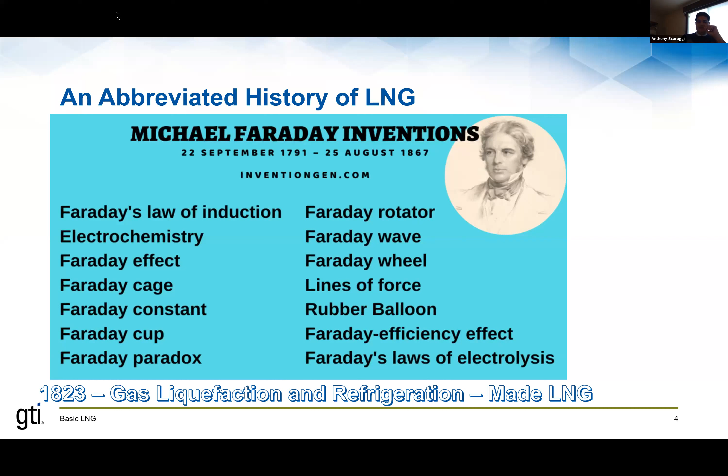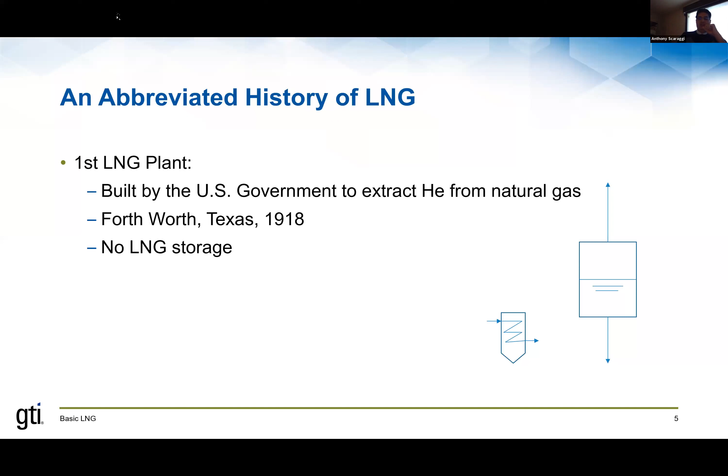The first LNG plant was actually built in the United States for the United States government, in Fort Worth, Texas. It had no storage. It was built to extract helium from natural gas to aid the World War I war effort. So LNG was, I guess you can say, a byproduct of helium production. That's another interesting tidbit.

The first LNG ship was developed by a company called Constock, ConocoPhillips, and Union Stockyard. Later Shell joined the mix. They converted a regular cargo ship to transport LNG. It was called the Methane Pioneer, a 5,000 cubic meter ship.

Its first LNG was produced in Louisiana in the United States and shipped to the United Kingdom. So the very first cargoes - people did not think in the old days of the United States as an LNG exporter. These days it's very different. But the initial shipment of LNG by ship was actually from the United States, which is pretty interesting from a historical perspective.

The first commercial LNG facility was built in the United States in East Ohio, at the East Ohio Gas Company, built in Cleveland in 1941. We learned a lot of lessons from that facility because one of the largest disasters occurred there at that LNG plant, which really taught the industry lots of lessons. We have a very, very safe industry now.

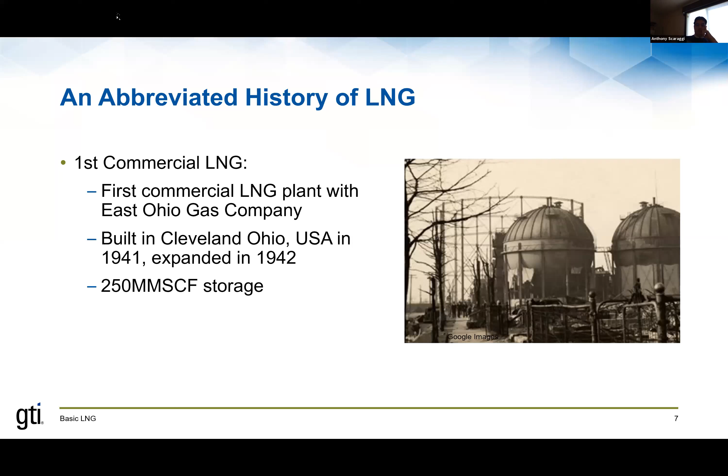The first baseload LNG export facility was in Algeria, commissioned in 1964-65, and it was in service up until around 2003. So it was a very productive plant. The original facility used a unique design where it actually stuck LNG into the ground and froze the ground - that was the tanking system used to store the LNG. That's not done these days because it's not very efficient, but it was a unique application back then. So that's the real basics of LNG history.

So what is LNG really? LNG is nothing more than natural gas that's been cooled down and turned into a liquid. Natural gas has many components. It has methane - the simplest hydrocarbon, with one carbon atom and 4 hydrogen atoms. Natural gas is made up predominantly of methane, but it also contains ethane, propane, butane, pentane, hexane, and many other things.

When you discuss lighter end components and heavier end components in natural gas, you're generally talking about molecule size. CH4 would be the lightest component, and hexane, C6H14, would be the largest component on this list. If you look at the right column, you see C6 plus. In the natural gas industry, components over C6 generally make up a very small part of the whole natural gas stream, so they tend to lump them together - C6 plus means any molecule of C6 and higher.

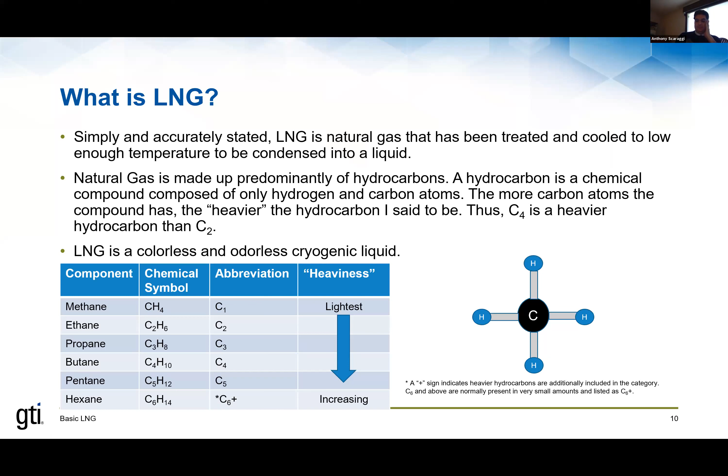What is LNG, and what are its properties? When you talk about LNG, and even natural gas, one tripping point is that all natural gas is not the same, and therefore all LNG is not the same, because LNG is derived from natural gas. So when you talk about the properties of LNG, somebody might say the temperature of liquefied natural gas at about 1 or 2 psi as a liquid is minus 260 degrees Fahrenheit, while somebody else might say minus 258, or even lower or higher numbers. It's not because one person is more correct - it really depends on the composition of that natural gas, from which you derive the specific properties.

So anytime you hear about a property in natural gas or LNG, and someone mentions minus 260 or minus 160 as to when vapors are lighter than air, just remember that. Just because someone else uses a slightly different number doesn't mean one person is right and one is wrong.

An important point here is that LNG, as it sits in storage, its composition will actually change over time. That's because it's slowly boiling away, and as it boils, the lighter end components predominantly turn to vapor, which means you're concentrating the LNG in that tank to the heavier hydrocarbons. So over time, the composition and all the properties of the LNG will change within a tank. The longer it's maintained in storage, the higher the heating value rises to, and it'll actually warm up in temperature.

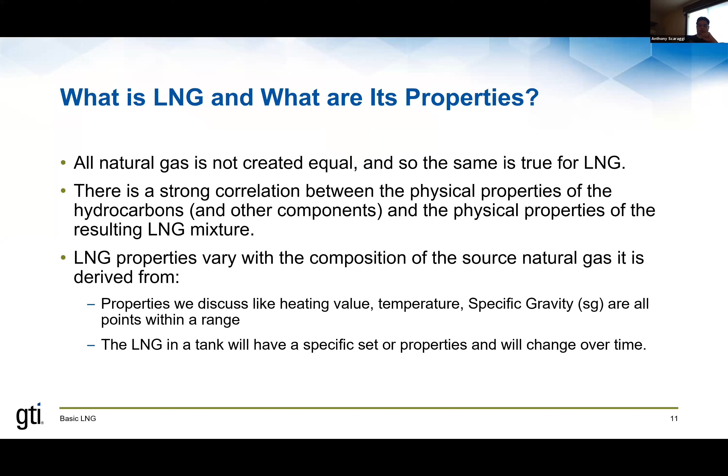But just something to keep in mind. So, properties of LNG: really what LNG is, is natural gas in its liquid state, mostly methane. It does contain ethane, propane, and sometimes traces of other components like butane.

When I showed you the previous slide, I showed you that you had methane, ethane, propane, butane, all the way up to hexane 6+, but you don't have all those components in liquefied natural gas. As you make LNG, those heavier components will actually turn to liquid sooner and be extracted from the process, because if they're not, they will freeze up in the equipment before you turn the methane into LNG. So even though natural gas has products up to C6 in it, you won't get that in your LNG. LNG is not stored at pressure, it's stored just above atmospheric pressure, and at that pressure LNG will remain at about minus 260 degrees.

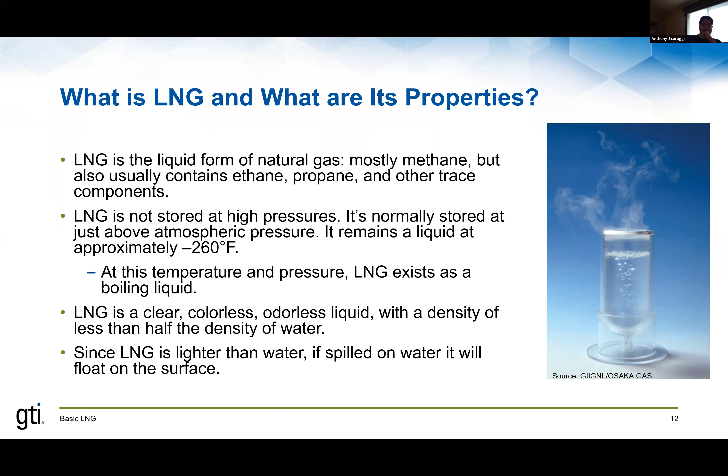So what are the properties of LNG? It's a cryogenic liquid, minus 260 degrees Fahrenheit, and as such it requires special handling. Those are cryogenic temperatures, very, very cold temperatures. When you liquefy natural gas, the reason you do that is because you gain a benefit, and that benefit is that you reduce the volume of that natural gas by about 600 to 1.

So you can think about a glass of water. You can have one glass of water or 600 glasses of water, and 600 glasses of water take up a lot more space. So when you're trying to store natural gas, if you store it as LNG, you can take up a lot less space. It's very, very economic that way, and it also lends itself much easier to transportation across great distances.

LNG is not flammable and not explosive. That's important, not everybody understands that LNG itself is not flammable. The vapors that are liberated from the LNG are flammable, and those vapors are just like natural gas vapors. Natural gas vapors are only flammable in the range of 5 to 15%, and in unconfined areas natural gas will not cause an explosion. So you have the same exact properties with LNG once it turns back into a gas as you do with natural gas.

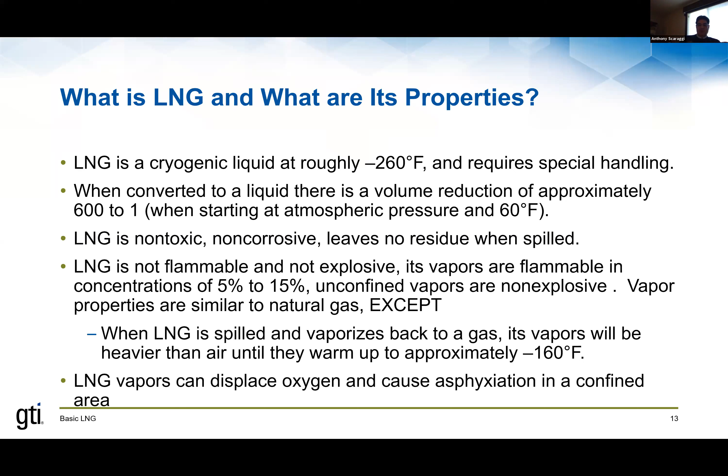So at minus 160 degrees Fahrenheit is about when the vapors of LNG become neutrally buoyant. So if you did have a spill of LNG, that LNG vapor would remain close to the ground until it warms up to minus 160 degrees Fahrenheit. At that point, it would then dissipate and act just like natural gas. And keep in mind, if you have heavy vapors and you're in a confined area, those vapors can actually displace oxygen, so it can cause asphyxiation if you're in a confined area.

So why LNG? We talked about this a little bit before. Arguably, the best reason for converting natural gas to LNG is because of the huge volumetric efficiencies you get in storage.

And those volumetric efficiencies allow natural gas to be efficiently transported over long distances. The other major benefit to LNG is that because you can hold so much volume in such a small place, a facility like this that may not have access to large pipelines, or in some cases may not have access to any pipelines, can still support a local grid system on natural gas.

So it's an available energy source, bringing a reliable energy source to areas where pipelines might not exist now but may exist in the future. You can build the natural gas infrastructure in a region, service that with liquefied natural gas, and then over time build a pipeline system into that area.

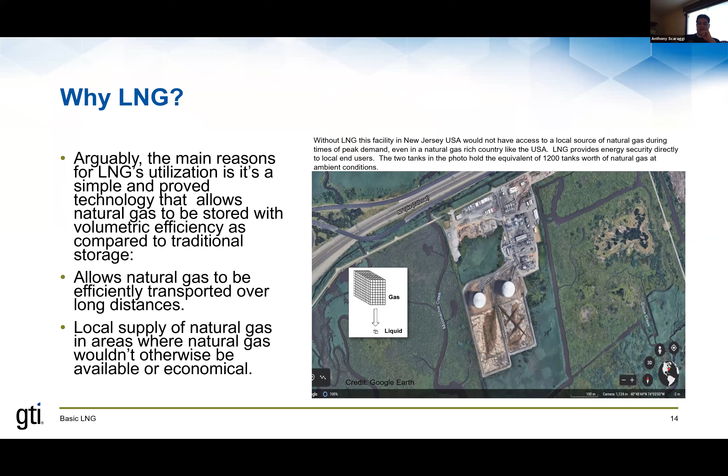So what makes LNG special? Well, one of the best parts, as a chemical engineer, I can tell you, is that it's easy - it's totally a thermodynamic process. There's no chemical process that takes place. If you have an air conditioner and understand how it works, it's basically the same idea for taking natural gas and cooling it down, except that you cool it down much colder than you do air in HVAC systems.

You cool it down enough so that you can turn the natural gas into a liquid, and that's at minus 260 degrees Fahrenheit.

As a liquid, being minus 260 degrees, the materials that you use that are required in an LNG facility or in LNG applications are very, very unique. As things get cold, they tend to get brittle. Brittle things tend to fracture, tend to be susceptible to shock and fracture as a result of that shock. So the materials used in LNG applications have to remain ductile at these very, very low temperatures.

The other special consideration is that the capabilities of materials at cryogenic applications have to actually be investigated in a laboratory and determined. You cannot extrapolate data to determine how a material will react at those cryogenic temperatures.

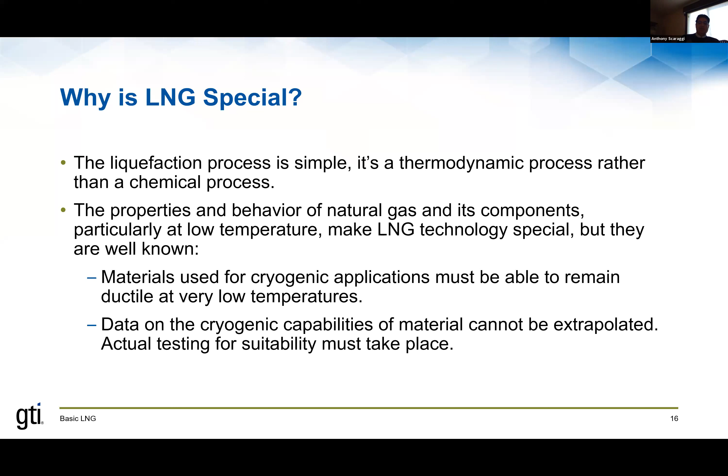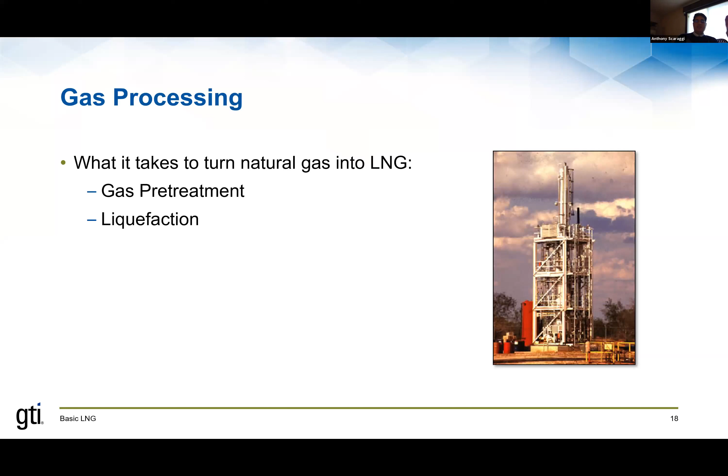Making liquid: what it takes to actually take natural gas and turn it into LNG involves two broad steps. One is gas pretreatment, and the second step is actual liquefaction. We talked about natural gas containing many, many components - when it's pulled out of the ground, natural gas contains methane, ethane, propane, butane, and heavier hydrocarbons. Well, that's actually after that natural gas gets processed somewhat to clean it up a bit.

So if you don't take all those items out before putting it in a pipeline and using that pipeline gas to become LNG, you have to take all that stuff out, plus more, before you can actually take that natural gas stream and turn it into a liquid.

In a natural gas field, you'll have nitrogen, ethane, butane, heavies. You'll have compressor oils, because in those wells, to extract the gas, you have compressors and equipment that you run. So there's compressor oil, there's hydrogen sulfide, which is a poisonous gas. There's water in that natural gas, as well as the other items we talked about. You have carbon dioxide, sometimes carbon monoxide. You've got all kinds of dust, all kinds of stuff that is naturally occurring in natural gas.

So in order to turn that into liquefied natural gas, you've got to get rid of all the stuff that's going to screw you up.

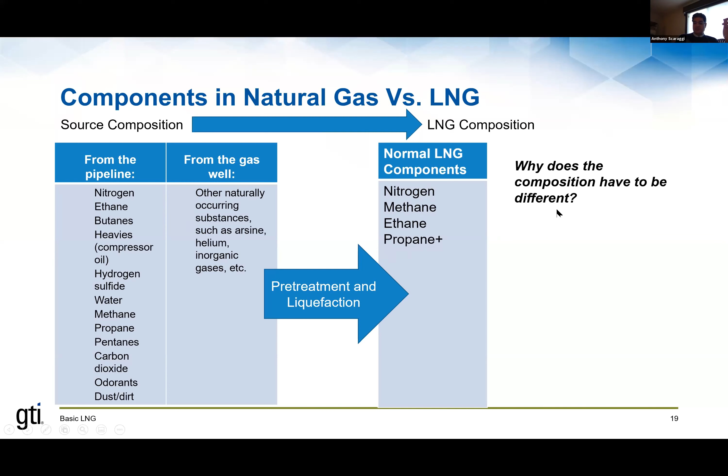So why does the composition have to be different? Well, I just gave you the preview on that. Components will freeze out, foul your equipment. You won't be able to make your LNG. You'll wind up having a lot of downtime in your plant. So these are the things that are typically removed from natural gas before you make LNG.

And mercury's kind of a critical one. There are trace amounts of mercury in some natural gases, and mercury will actually cause a specific type of corrosion in aluminum equipment. So if you have mercury in your gas, you have to have a special treatment system to remove that mercury. Otherwise, not only will you foul equipment, but you'll also have stress corrosion take place in that equipment.

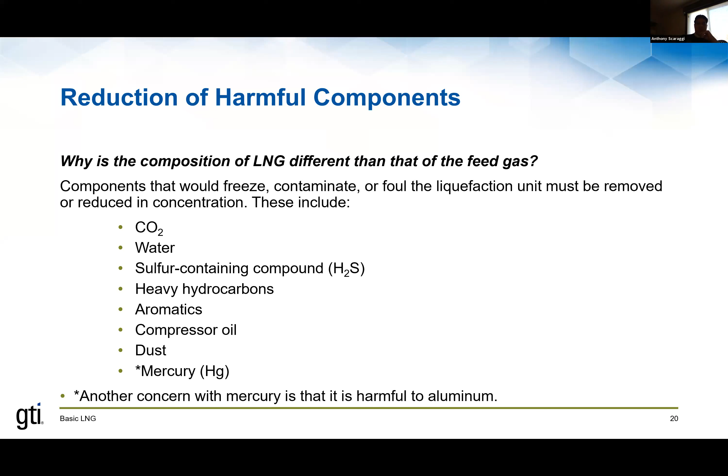So how is LNG made? There's really two steps to the second part of the process. There's the pre-treatment, then there's making LNG. It's a two-part process. You start cooling everything down, and you start removing the heavier liquids that will come out.

So if you have any pentanes, they will start to condense out as the temperatures get lower and lower. And so you remove those from your process as you go along. You don't carry them over into your process. Otherwise, once again, they would freeze out and plug up your equipment.

And then you have the final stage of liquefaction, something called a flash. This is also called a Joule-Thomson valve, or Joule-Thomson effect. There's also a flash valve in your normal air conditioning equipment at home, so it's no different than that. But this is the final step in making LNG.

It's a flash process where you take cold LNG that's at high pressure, coming out of this unit, and you let the pressure down very rapidly to a lower pressure, somewhere in the neighborhood of 30 or 35 psi, depending on the height of the liquid you're depositing into. That's an isenthalpic reaction, which simply means there's no change in enthalpy across that valve. And if you look at the enthalpy curves for any fluid, any gas, any liquid, you'll see that a rapid reduction in pressure gives you a very steep decrease in temperature.

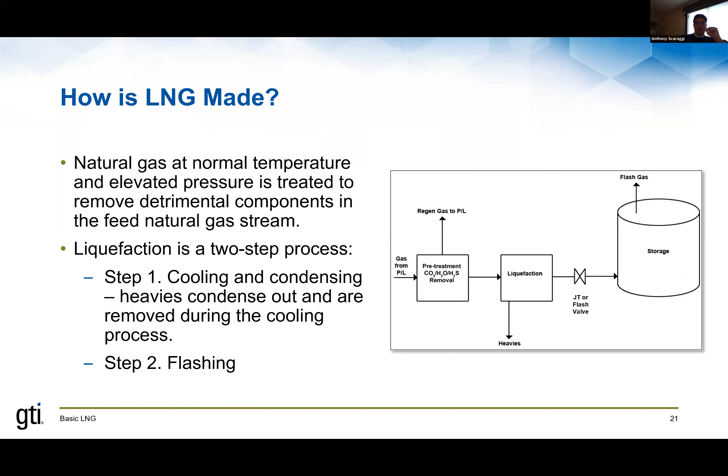So making gas, right? Now you've got this liquefied natural gas, and it's been stored or transported to an area and kept in storage where it can be used, or it's needed so it can be used. And now it's time to use it. So what do you have to do? You have to turn it back into natural gas, into gas.

So the easiest way to do it is just to heat it up. You take that minus 260 degree LNG, put some heat into it to the point where it all vaporizes, turns back into a gas, and then you heat that gas up to some usable ambient temperature. How that's done is with equipment called vaporizers. There are several styles of vaporizers, and I have a few listed here: an open rack vaporizer, submerged combustion vaporizer, shell and tube vaporizer, ambient vaporizer. Regardless of the equipment you use, the goal is just to drive heat into that cold liquid to turn it back into a vapor so it can be used, either put into a pipeline or used in some other chemical process, like making fertilizer or whatever. But you need it in its gaseous state to actually use it.

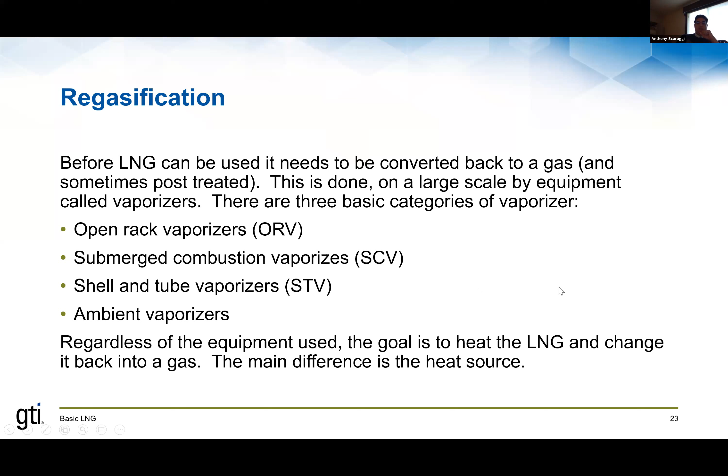One of the benefits of it is that you're not using any additional external source of energy to heat up the LNG. You're using the temperature of seawater. You don't have to burn natural gas and use the heat from that combustion to turn this LNG back into a gas. So seawater is one vaporization system that's used for that, and there's no additional heat source needed.

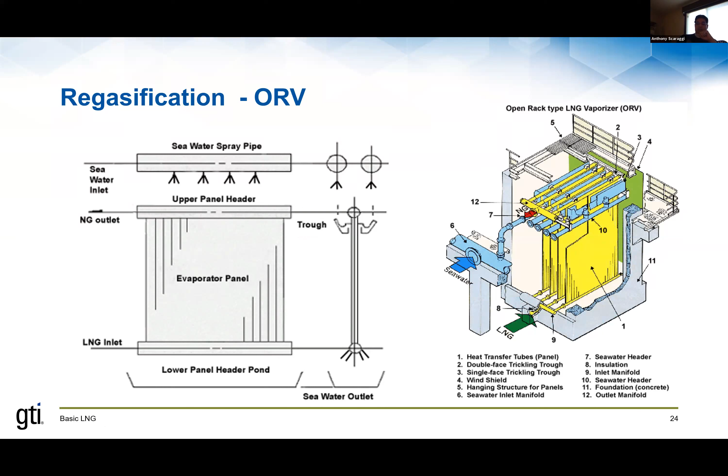You actually have the flame and its products of combustion impinging on the water. If you had one of these things operating and could look inside, which you can't since they're steel or concrete boxes, but if you could cut a window into it, what you would see is something that looks like a jacuzzi - water just bubbling away, lots and lots of turbulence, which makes these things very, very efficient. You've got this burner, using natural gas to fire these, and you send liquid LNG into a big tube bundle, a pipe that's usually coiled up inside this water bath, and around the water bath are the products of combustion being pushed up through the water over this water bath.

That intimate scrubbing effect you get from those bubbles transfers a huge amount of heat from the combustion process into the LNG in the tube coil, turning it back into natural gas, or turning it into its gaseous stage.

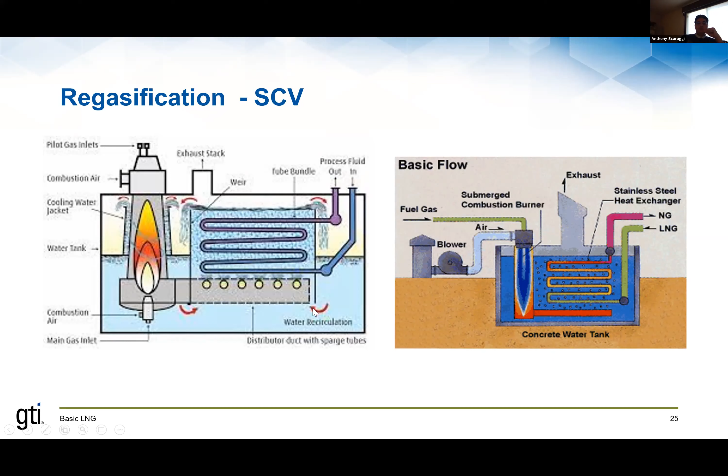Shell and tube vaporizers - anybody who's been in the process industry has heard of a shell and tube heat exchanger. That's all these things really are, very big heat exchangers. You've got a vessel, and I don't have a cutaway picture, sorry. Inside this vessel you have small tubes going from top to bottom, many packed together - it's called a tube bundle. On the outside, you have a vessel that surrounds that tube bundle.

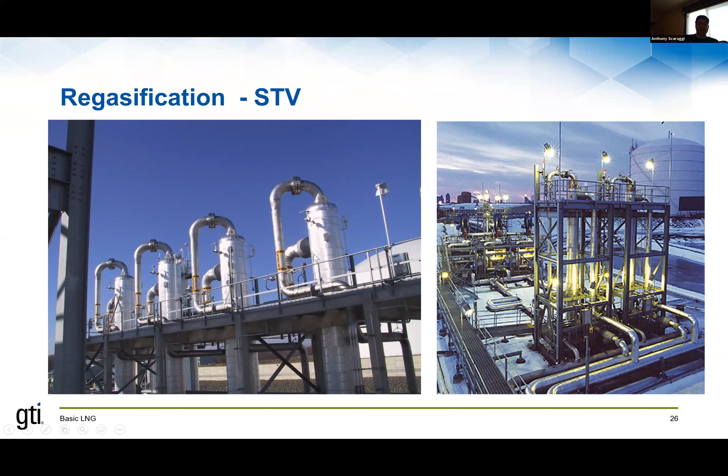You send liquefied natural gas in through the little tubes in the middle, and around the outside you circulate some form of heating fluid, whether it's hot water, a glycol water mixture, or some heat exchanger fluid. Then you recircle that fluid back to the heat source, reheat it again, and keep circulating it through what's called the shell side of the exchanger. The LNG comes in through the tubes as a liquid, gets heated up as it moves through the vaporizer, and comes out as natural gas. It's a very simple process.

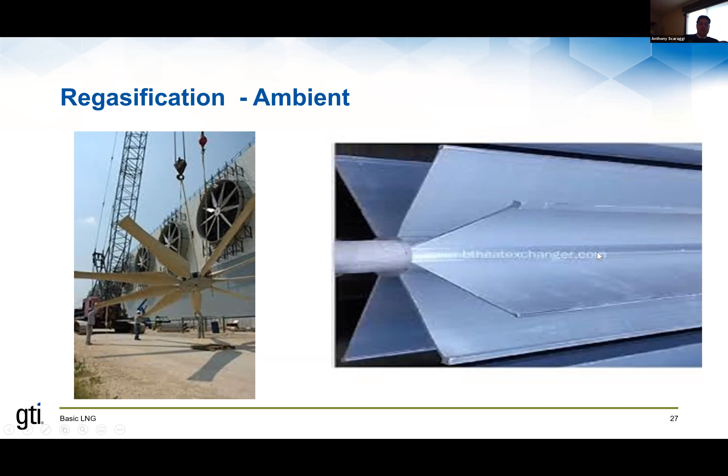Then you've got ambient vaporizers, where you can just use air to turn the LNG back into natural gas. Works really well if you're in a warm climate. That said, it tends to require, as you can see the size of this fan, huge fans to get enough air movement across what you see on the right here, which is one component, one star fin, as they call it, of a vaporizer. So these big fans take ambient air and blow it across these ambient vaporizers, warming up the LNG, turning it back into a gas.

Other plant components: the pretreatment system - I made it simple, I just said you take a bunch of stuff out, right? But it's got some complicated systems associated with it. There's the amine system, which is used to remove CO2, carbon dioxide, from the natural gas.

An amine system can also dehydrate or remove water from the natural gas stream. There are other ways to remove water too, with something called molecular sieve beds - that's just another way to do dehydration. And as I said earlier, if you have any mercury in your gas, it needs to be removed because it can be detrimental to any aluminum components in your systems. So there are mercury removal systems in these facilities.

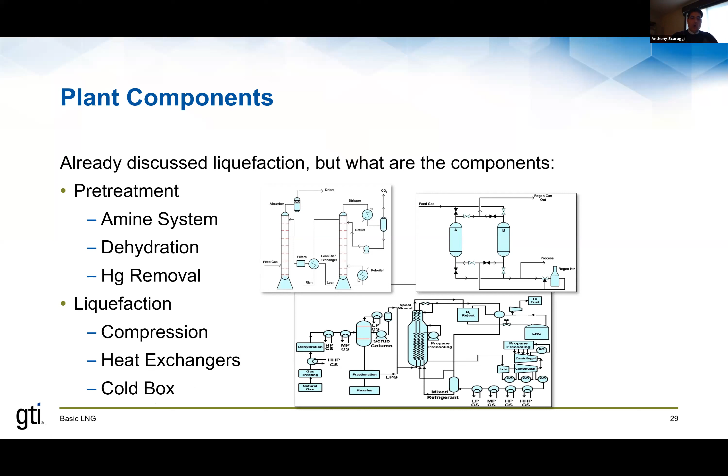On the liquefaction side, just like an air conditioner in your house has a compressor, a major component in turning natural gas into LNG is compression. So usually you have very large compressors, and many heat exchangers, because you want to take that natural gas and cool it down. These large heat exchangers are generally all placed in one big tower, called a cold box. One benefit of a cold box is you have all this equipment in it, and you can just throw your insulation into that cold box and insulate everything, rather than insulating each individual pipe, elbow, and component. You can do it as a whole - that's just a more efficient way to insulate the equipment.

A major component of a plant is a tank. There are several different tank designs: single containment, double containment, full containment - what that means is essentially how the LNG is stored in that tank. A single containment tank means the LNG is contained by one system. So in a single containment tank, you will generally have a 9% nickel steel tank that actually holds the LNG.

And then you'll have another tank built around that tank, made out of carbon steel. Carbon steel is not a cryogenic steel, it will get brittle at about -20 degrees Fahrenheit. So if you were to have a leak from the inner container, that 9% nickel steel container, and it were to leak out and make contact with that outer tank, the outer tank could not support those cryogenic temperatures and could fracture and fail. So a single containment tank has the LNG in contact with the primary inner tank, and only that primary inner tank can actually contain the LNG.

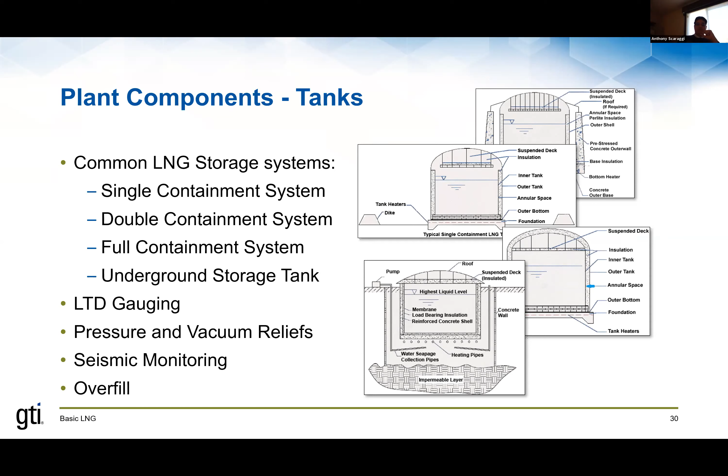Another component of a plant that turns gas into a liquid and exports it, or maybe a facility that does not export gas and just imports gas and doesn't make their own LNG, is a shipping berth.

Some of the components of a berth. A berth is designed so that the ship can be moored safely, and there are simulators, the most common one called Optimoor. It's a simulating system that simulates the actual berthing of a ship, given the tides in the region, the currents in the region, the composition of the dock, and the position of the bollards and such.

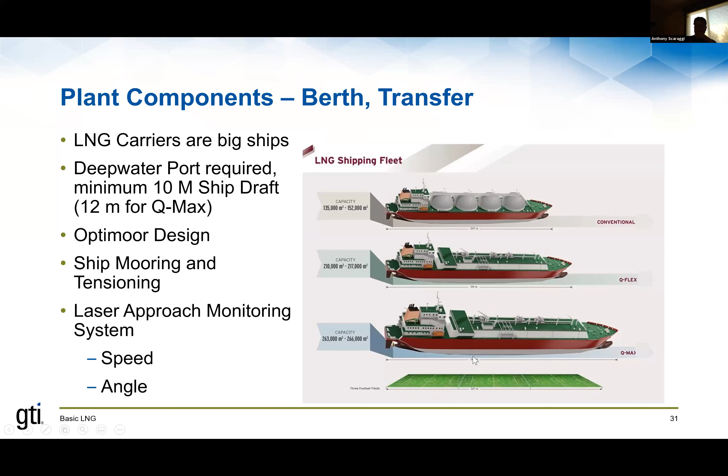There are pumps in those tanks. The pumps pump the LNG out into these unloading arms, which are connected to a piping system and bring that LNG to the plant, back into storage.

One of the safety systems on these arms are called PERCs, which stand for Powered Emergency Release Couplings. So if you were to have an incident or severe movement for some reason of the ship in the dock, these connections can automatically release, and the ship can be released from the docking facility.

Also, there's a system called an umbilical connection, which is connected to the ship and allows the plant that's receiving the LNG to communicate with the ship. And when I say communicate, I mean through control systems.

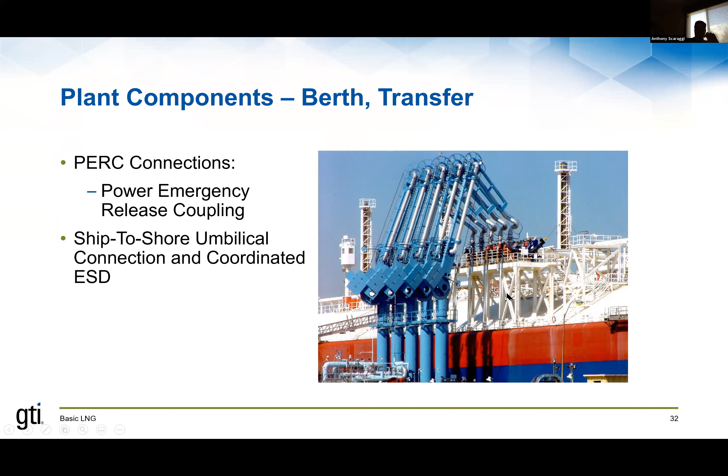So if you were to have an emergency shutdown occur, or a sudden change in pressures or flows that could be detrimental to the plant, it could shut down the ship transfer, and vice versa. If you had an incident on the ship where something occurred, and the plant wanted to protect itself, the control system could isolate itself from the ship, and the ship can isolate itself also from the plant.

Fire and gas detection system. So we talked about some of the design points in an LNG facility, but a very major component is the other control systems. And there's...

There are many hazards in any plant, but in LNG plants, your major hazard is fire. When you build a facility, there's a specific kind of study done to determine where those hazards are, the most likely places for hazards to occur, and which components should be installed to detect those hazards and do various things, whether it be shut equipment down or notify people that there's a situation. An alarm will go off and notify an operator that maybe there's something they should look at.

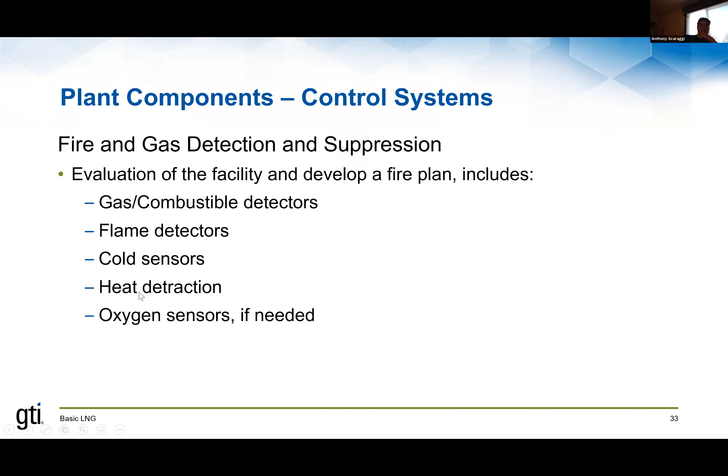A major part of the design of an LNG facility are the fire and gas detection systems.

Also in LNG facilities, there's the big red button. They're strategically located in many places throughout the facility, plus also in control rooms, which allow anybody basically to push that button and completely shut down the LNG operations, putting the plant in a safe state.

So an ESD system would close all the valves, make everything safe, in case somebody thought there could be a hazard.

There's also pressure relief devices located throughout the whole facility, where you protect piping and equipment from surges in pressure. One of the ways you can get a surge in pressure, as we said, LNG is liquefied natural gas at minus 260 degrees, and it's got a 600 to 1 expansion ratio.

If you have a pipe and you close the valves and don't let that LNG flow anyplace, and it starts to warm up, it'll want to go back to 600 times its volume. What will happen is you cause increases of pressure in that section of pipe. Throughout the design of the facility, you have pressure relief devices located to relieve those conditions if that were to happen.

Your control systems include temperature control and flow control to regulate how the systems work, whether they're producing LNG or vaporizing LNG. The flows and temperatures are critical to the operations, and they're monitored and controlled by a control system.

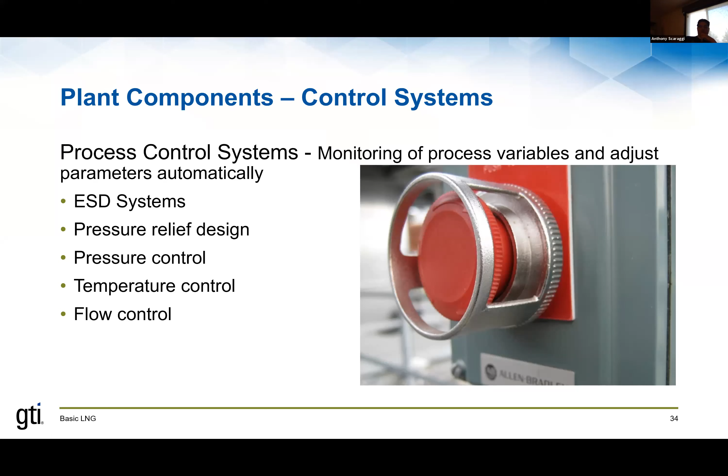Codes and standards, a basic introduction here. NFPA 59A is the standard for production of LNG, and it's been around for a very long time. First published in 1967, it's actively updated as the industry changes, as technology changes, and as more is learned about safety. If any lessons learned are out there, it's updated on about every 3 year schedule. It's been widely adopted throughout the world as the standard used to build and operate LNG facilities.

Sections within 59A are actually built on some parts of U.S. federal regulation. 49 CFR Part 193 is the U.S. LNG regulation, and within this document you'll find requirements that mimic 59A. You'll also find within 49 CFR 193 many parts of 59A directly referenced. It's a very well used, well designed standard.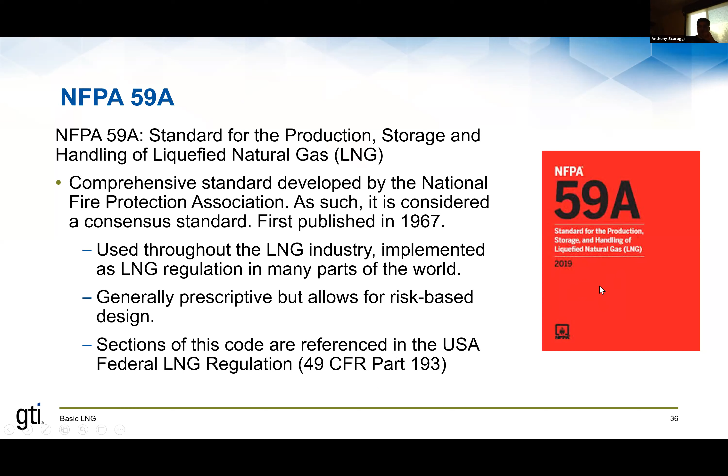There's also a well-known, well-used European standard, EN 1473, for the design of onshore LNG facilities, and it is more of a risk-based design for LNG facilities. So NFPA 59A and the U.S...

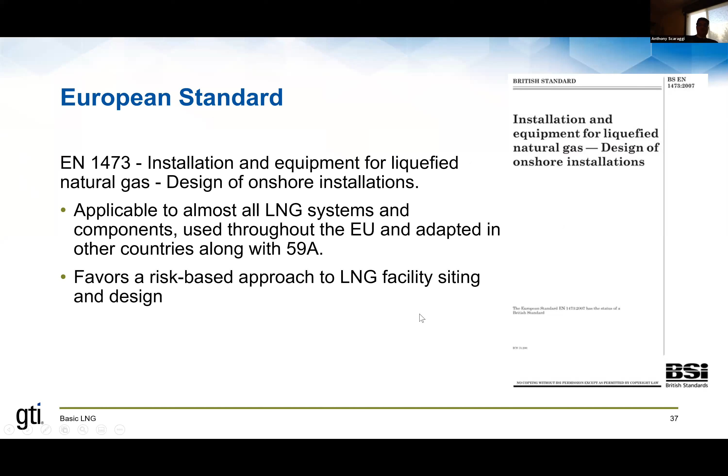Regulations are very prescriptive in how you design an LNG facility. NFPA 59A does have a whole section on risk-based design, but the European standards have always been risk-based design standards. It's a completely different strategy on designing a facility than a prescriptive strategy, which has been the U.S. strategy forever since the regulations were written. So I don't know if Kajin is around, but Kajin's with GTI, and you've got me on the right there.